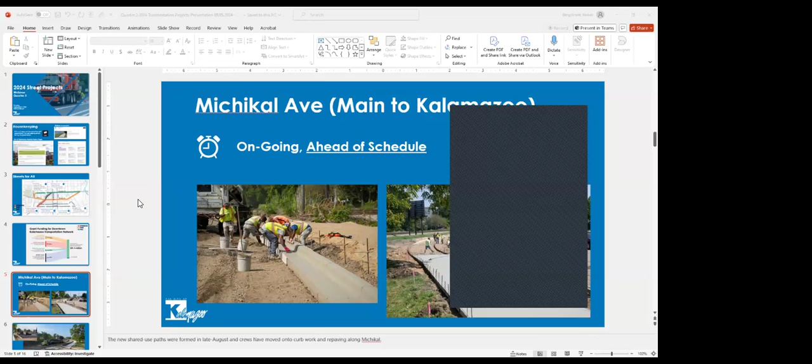It's on schedule. I'll jump ahead here quick. So they've actually been laying the new multi-use or shared use path along Michikal, and they've been forming curbs, and they're also working right now to finish up and start paving Michikal Street. So when Michikal's opened again, it will still function as a one-way street temporarily while the other big street projects downtown move forward.

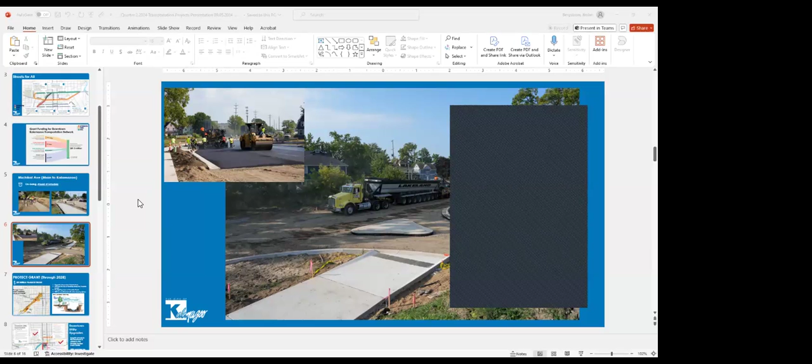So as the network is getting converted from one-way to two-way, there'll be some temporary traffic movements. Once Kalamazoo and Michikal Avenue are fully converted to two-way, then it will be a two-way system as we move on to other projects specifically outlined on this map.

So we're hitting them in pairs, right? We're doing Kalamazoo Ave first, then Michikal Ave, and as you can see, there are also going to be opportunities to redesign South Street and Lovell Street to be two-way streets, and then that section of Stadium Drive shown on the map, called the Spaghetti Bowl by a lot of residents, is also planned to get reworked.

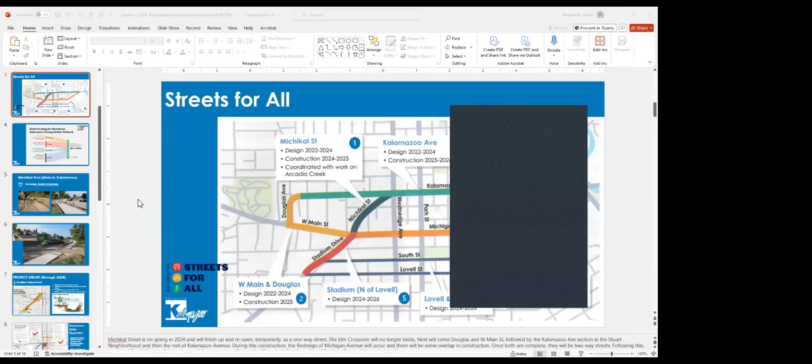Pretty exciting stuff in the downtown area, and this map is pulled directly from our City View newsletter. This went out over the summer to keep people informed. It's also available online, but I wanted to go over these big picture, high level projects, and talk a little bit about how a lot of this is getting paid for.

So, all of this money is federal grant dollars. It's really what's making all this possible for the city of Kalamazoo. It's kind of unprecedented to have this much funding available from the federal government to complete this work. And it's all stemming from federal programs that are very specifically focused on safety, reconnecting communities, and revitalizing some of our transportation networks and how we think about them. So this has enabled us to complete this work over the next coming years.

So I just wanted to highlight that real quick too.

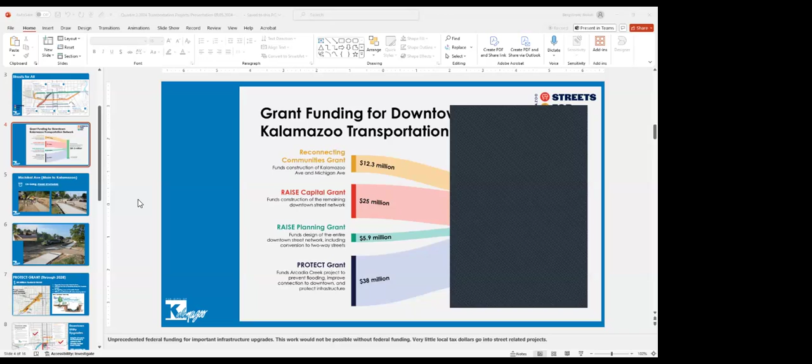As part of that work, this was touched on at the previous webinar. One big chunk of the federal grant dollars we received was through the Protect grant, which is specifically focused on the creek as it goes from downtown towards Western's campus on Stadium Drive.

We'll have the opportunity to daylight the creek, upgrade stormwater infrastructure, and bring the properties in that area out of the floodplain, or eliminate the floodplain in the orange area you see here, which will be helpful for residents in the Stuart neighborhood, West Main Hill, and small portions of Vine.

And as you head southeast or southwest on Stadium Drive, that small portion of East Campus built into the hill where Waldo Stadium is. So, a pretty big investment in stormwater in and around downtown.

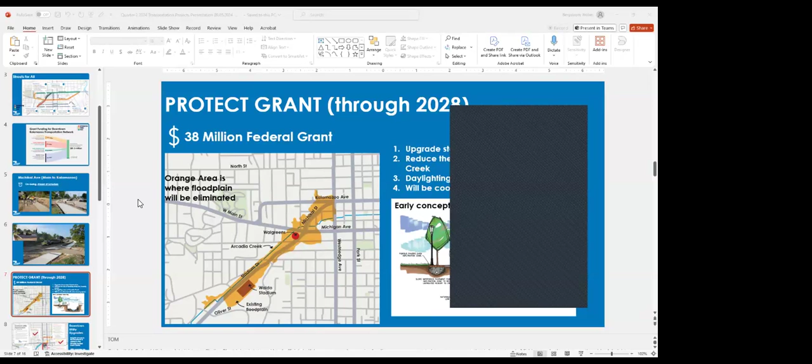I wanted to touch on some of the big work that's been going on downtown that's been affecting a lot of folks' commutes. A lot of that work is utility upgrades related to the privately funded event center.

This was on the horizon, but wasn't fully anticipated when some of the other city street projects were planned out. So there's been some pivoting to make sure these projects coordinate to the best of our ability with Consumers, our own staff, and event center folks, trying to mitigate some of the headaches involved with detouring.

A lot of the infrastructure in the downtown area is very old, so it's pretty intensive work to go in and upgrade these utilities. But the positive part is that they probably won't need to be upgraded again for a very, very long time. This work is necessary and it's going to be a game changer in and around this area, so we specifically appreciate people's patience with this utility work.

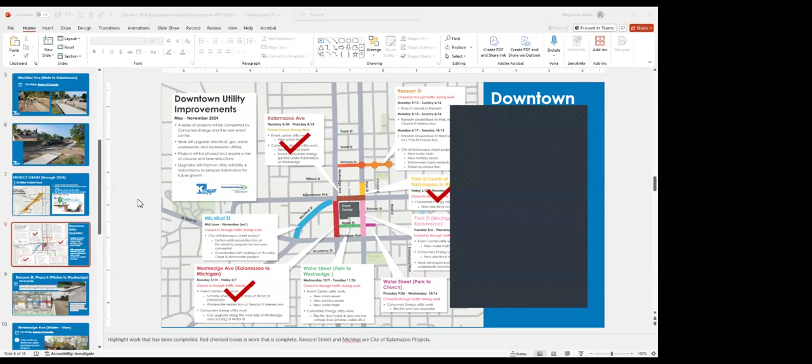There's been other utility work too throughout the community with Consumers Energy, AT&T, and others doing upgrades. It's good to get utility upgrades, but understandably it can be very frustrating if you're along a detour route. We wanted to recognize that and appreciate everyone's patience. The two street projects the city is focusing on are Michikal and Ransom Street.

Pivoting to Ransom Street - there was a big portion of work done last year called Phase 1. There's now Ransom Street Phase 2, which has been ongoing. A lot of the work right now is focused on the actual roadway surface, forming and installing curbs, sidewalks, driveway entries and exits.

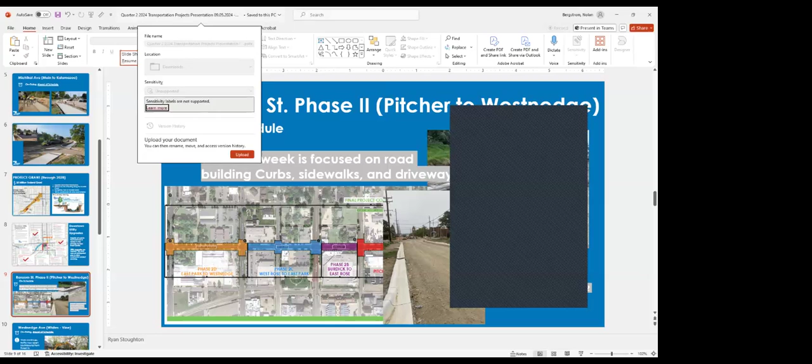Dennis, is there anything you wanted to add here? No, but I do have a comment, Nolan, because some folks have mentioned it - there's a big black square on the right side of the screen obstructing part of your view. I don't know if there's anything you can click on to get rid of it. Oh, sorry, okay, let's see if I can fix that. How's that? That's better, Nolan, thank you. Perfect, okay, sorry about that, folks.

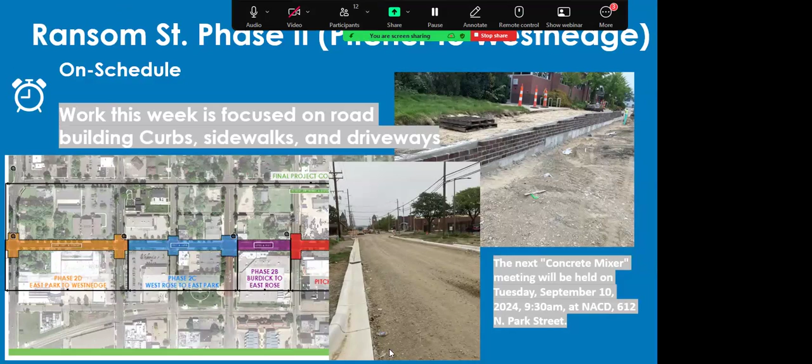As I was saying, if you can now see this picture, it's showing some of those brick pavers being reused in pedestrian elements along Ransom Street. It'll be a cool and historic way to call back to those pavers along Ransom Street.

I also wanted to let people know that staff and the consultant team working on this project have been holding community meetings at regular intervals throughout the year. The next one is Tuesday, September 10th at 9:30 a.m. at the Northside Association for Community Development Building at 612 North Park Street. That's a chance to talk to staff and consultants about questions you might have.

That opportunity has also been there for businesses, given the obvious detours still going on. But this work is on schedule, it's moving forward, and it's now highly focused on the surface level treatments.

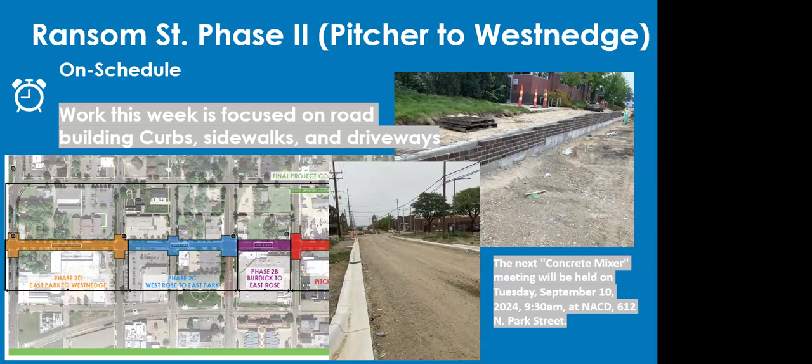Dennis, did you want to talk a little bit about Westnedge? Sure, I can do that, Nolan. Hello, everybody, I'm Dennis Randolph.

Westnedge is starting tomorrow, reaching a really important point. We have some major connections. Westnedge includes water system improvements, sanitary system improvements, along with road resurfacing and restoration, and stormwater repair. So it's quite a complex project.

Starting tomorrow night, we're going to be making a major connection between the work we've been doing on Westnedge and on White's Road, which has also been a major project that Nolan will talk about in a minute. We have to connect the water and sanitary pipes together where they intersect at the intersection.

The project is basically on schedule. It's been a long, hot summer, and we appreciate that, but we're online to finish this in the fall as we had planned.

This weekend, starting tomorrow night, we are going to make those connections at White's and Westnedge. To do that, we need to close access to White's Road, since that's where the connections have to take place. So starting tomorrow night and running through Monday morning, White's will be closed on the west side of the intersection so we can do the work.

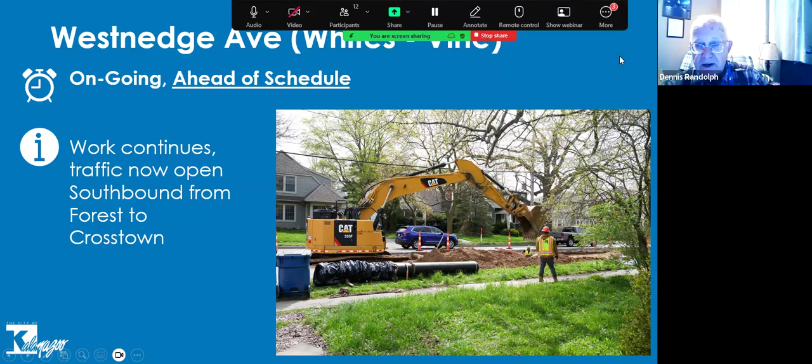So again, watch for the closures this weekend. We know some folks need trash service for the location just to the west of Westnedge, and that will still be able to take place. We've alerted our contractors to make sure folks can have their trash picked up.

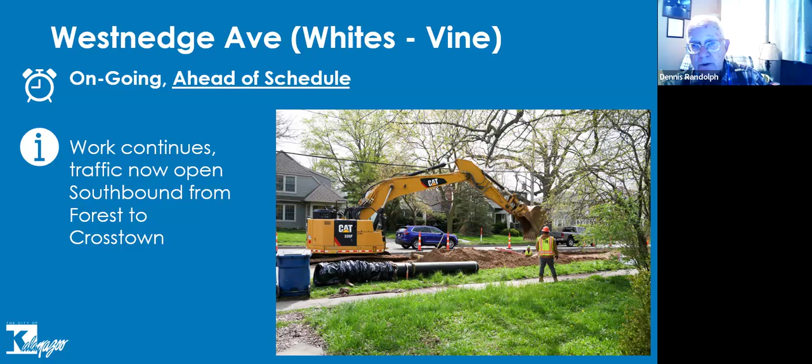If you don't, or if you have a problem, we have inspectors on site. Grab one of them or call 311 and we can make sure and take care of it for you. But hopefully there shouldn't be any problems, the contractors are aware. So anyway, that's where we are with Westnedge.

Yeah, so Dennis talked about it a little bit too. White's Road is closely connected to the Westnedge project. Today through Monday, White's Road is going to be closed at Westnedge Avenue for that necessary work.

But we are closing in as we get towards the end of the year, where a lot of these projects are going to start wrapping up. The big reconstruction projects, similar to downtown utility work, are mostly primarily underground projects. So this is replacing infrastructure that is fairly old, maybe past its life span and needs to be replaced. That's the kind of grueling work, the underground work. We're getting past that now, moving towards more of this finishing-up type work, resurfacing curbs, sidewalks when applicable. So we're close.

So that's all good. We've got some other projects going on too, smaller scale but citywide, that some of you may have noticed. In particular, one federally funded program ongoing right now is the Safe Streets for All. That's different than the downtown work.

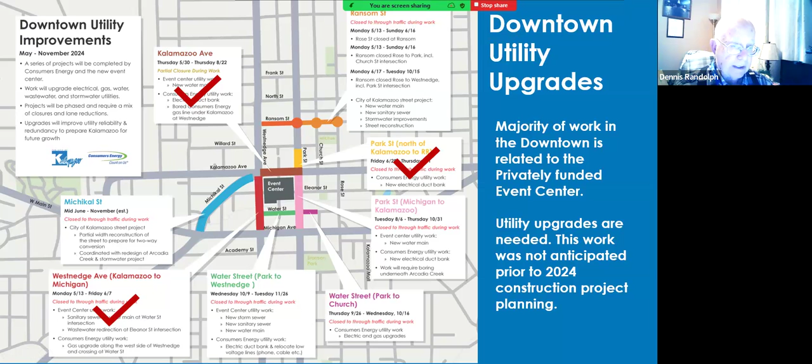There was one other, the next one too I see is about the Protect Grant, and I can talk about that. Protect Grant is the big drainage project Nolan mentioned at the beginning that goes from Westnedge down along Michikal down to Oliver Street to basically Waldo Stadium.

And that project has about 4 phases. They're going to extend over the next 4 or 5 years. Phase 0 is actually work that the event center developer is going to do, and we are preparing plans and getting permits for that, or they are right now. We have to clear NEPA.

Everybody knows about NEPA, the National Environmental Policy Act, and also Section 106, which is the Historic Preservation Act. We're going through those clearances right now along with the developer. Work will probably start on phase 0 — I don't know if it'll be later this year, but early next year sometime or by the spring.

And then we will be following successively down Michikal towards Stadium towards Oliver over the next several years. We have not let the design out for that work yet because we're still coming to our final agreement with the feds to give us the money.

Okay, they granted us the money, but we have to have an agreement with them, which is great. We're still working that out. When we have the agreement done, we'll be hiring consulting engineers to do the design for those other phases of work. Right now we're clearing NEPA and Section 106, which are important things to take care of, and we're doing it up front, which I think makes everybody happy.

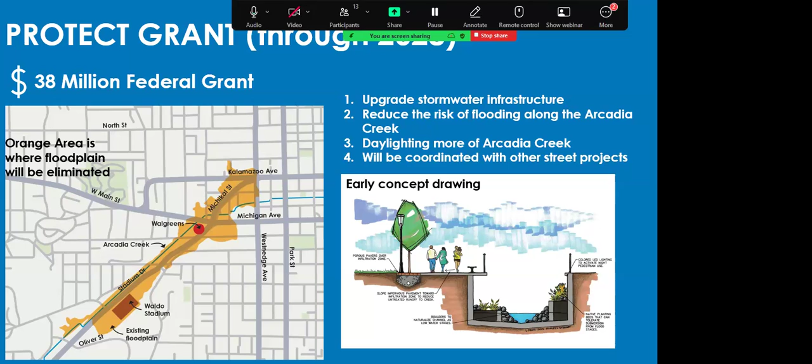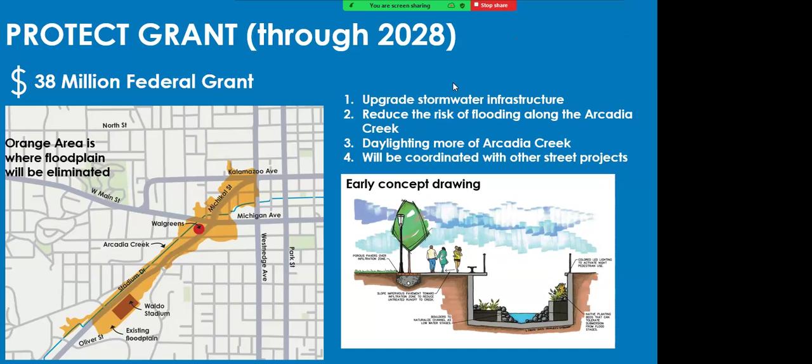I saw another question come through related to Safe Streets for All, some of those pilot projects. Yes, to a certain extent, with Safe Streets for All, these are kind of longer term pilot projects.

We might determine, say we put a mini traffic circle in at an intersection and we're monitoring it over its pilot period, and we determine, hey, that might not be the best treatment for that intersection. There is flexibility to take a look at maybe another option to try and make that intersection safer. So yeah, there's some flexibility with the pilot projects as we monitor them to see how they can be tweaked over time.

A good example is Lovell Street. There were some bollards that were removed and readjusted, right? So we're able to make incremental changes over time and track the progress of each of these.

With the mid-block crossings as an example too, right now those mid-block crossings that are installed are on grade with the street. A finished product for a mid-block crossing will look kind of like what is along Rose Street downtown by the museum - that has raised curbs. Another example is there's a few others along Oakland Drive.

Another opportunity to get connected on some of the regional projects is to attend Kalamazoo Area Transportation Study meetings. If you go to the Kalamazoo Area Transportation Study website, you can look at attending as a citizen. For those that don't know, that's our regional transit related planning organization. So it's just an opportunity there to get connected. We usually have folks from all different jurisdictions: City of Portage, City of Kalamazoo, townships, Road Commission, MDOT, regional folks. So it's a good opportunity to connect at those meetings.

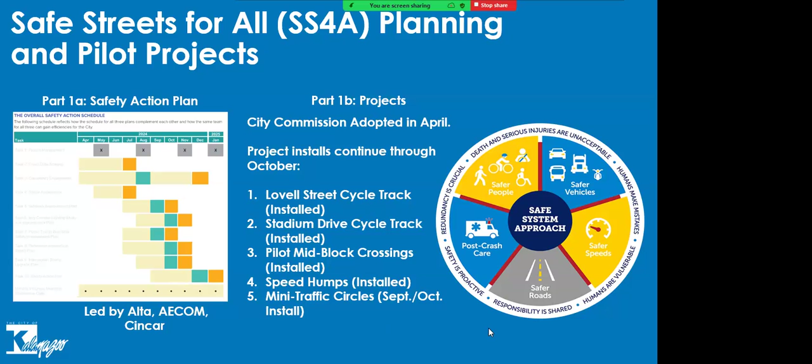We've been really appreciative of folks' patience when it comes to these projects. It's been a pretty hot summer as well. So as you see information out there about crews working on these pretty intensive projects, just recognize and remember that these are people doing their job, and some of the weather we've had this past year has been pretty dangerous in terms of heat and humidity. We greatly appreciate the patience from everybody.